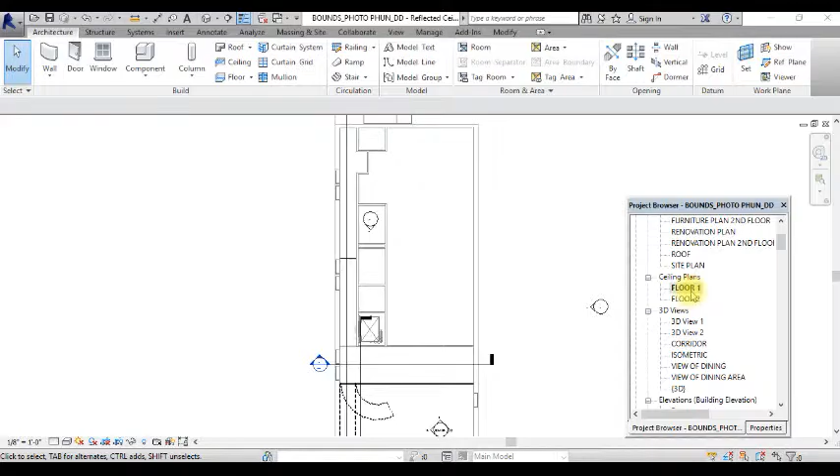Welcome. We're going to continue developing our corridor ceiling and our restaurant ceiling. What I'm doing right now is showing an underlay of what is on the first floor, and this is helpful when we're working on reflected ceiling plans to see what is on the first floor underneath, say some furniture.

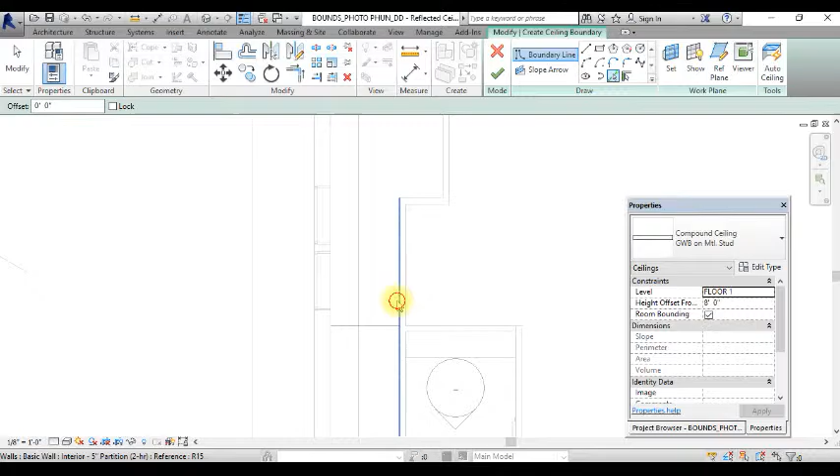Now in the corridor, I've set up another sketch ceiling, and I'm just putting them in at different levels. I can't get two different heights out of one ceiling, so I have to make it in different sections, and where the height changes, that's where I need a soffit.

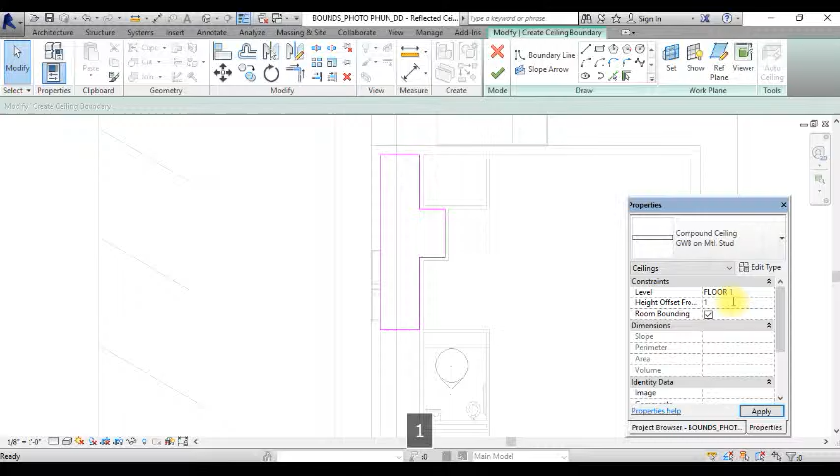So I'm just putting in the last little bit of ceiling. As I said before, you're going to need to put in a ceiling in every room, including the kitchen. And there's my last piece of ceiling, and we can see that it raises and lowers in the hallway going to the reflected ceiling plan.

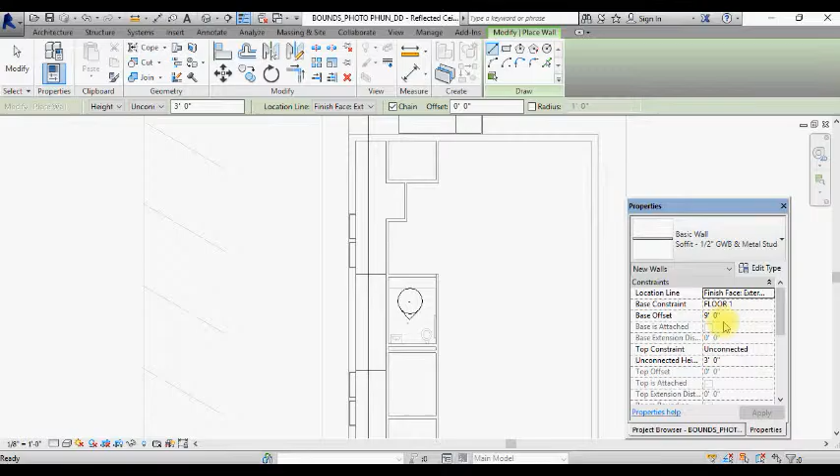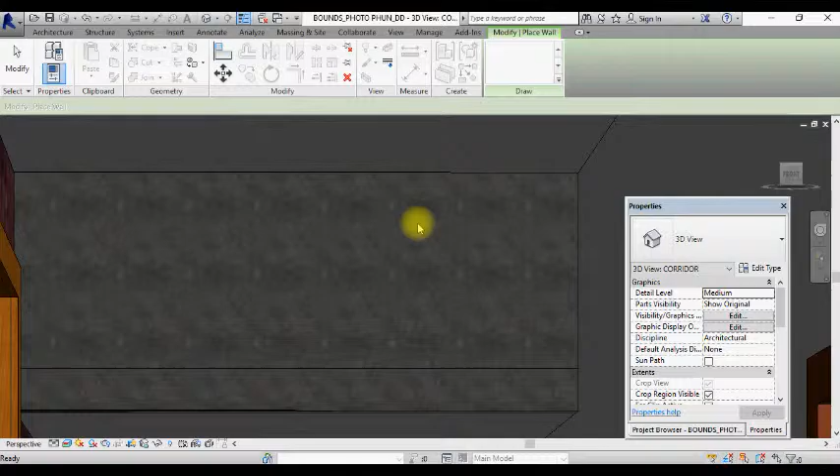And here's where I'm going to put in my soffit wall. Now, a note of caution: when we use a soffit wall, first of all, it's a very thin wall, literally 2 inches thick. Once we set it to be base offset of 8 feet or whatever we've used, we have to remember when we go and put in a different wall that it would also try to come in at 8 feet. So you have to be very mindful when you're using the soffit wall that you remember to reset it back to 0 if you need to do other wall work.

Now here I'm just painting my ceilings, my gypboard, making sure everything's that crisp white that I want to use on the project.

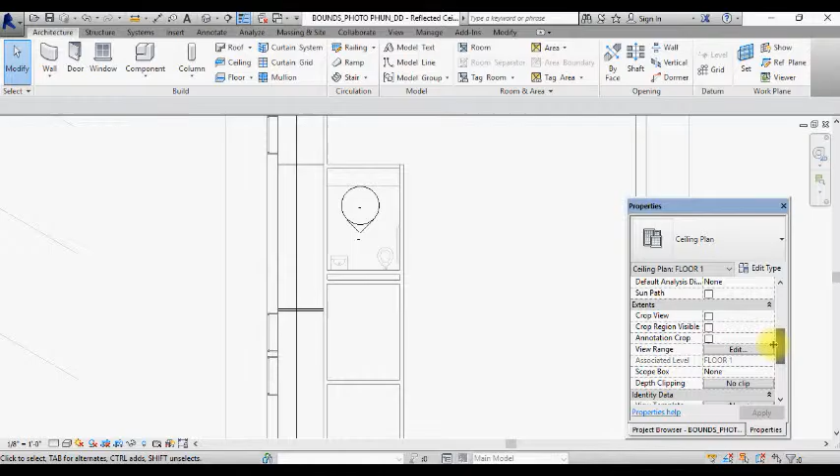Now, one of the things that happens with reflected ceiling plans is that we cannot see the ceiling or the floor. So there's a couple of different things. One is I'm going to lower the view cut line so that I can see where the doors are, because I wanted my ceiling to coordinate with my restroom door location, so I could put some signage there.

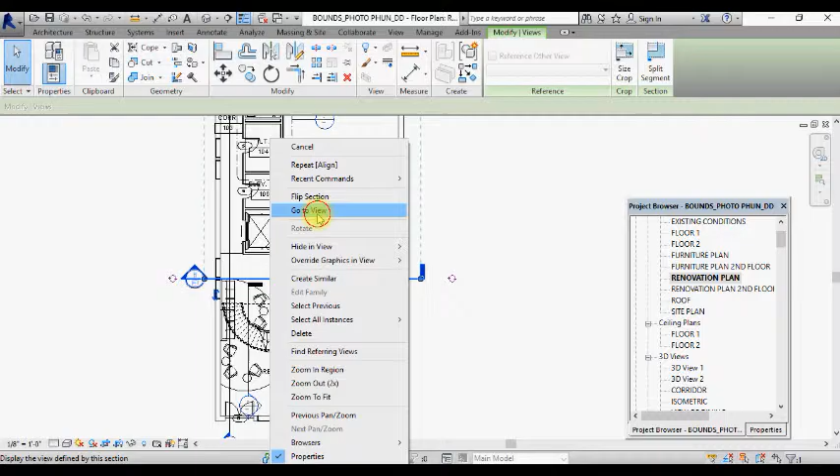I'm going to go back to my section, and I can see the first floor ceiling is in, and I have the second floor ceiling in as well. And that's what we want to see.

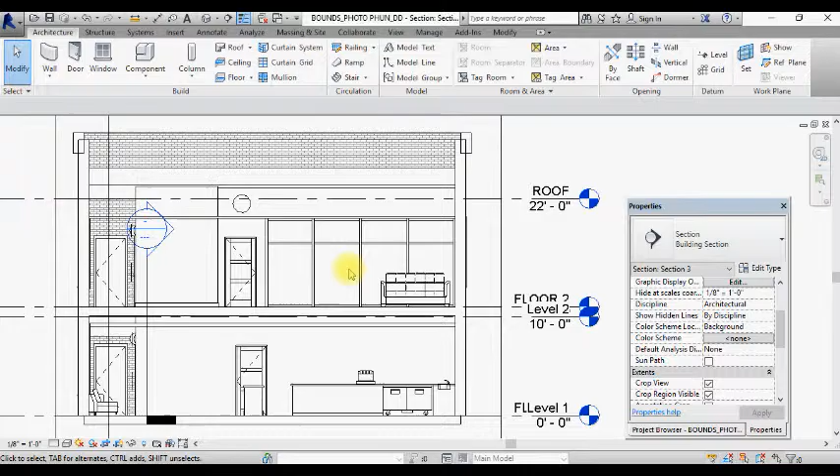I'm going to change out a door. I found those TruStile doors, loaded them in, unloaded the zip file. Here I'm simply changing the door, and there are other options for these panels on the doors, and I'm just working with them now.

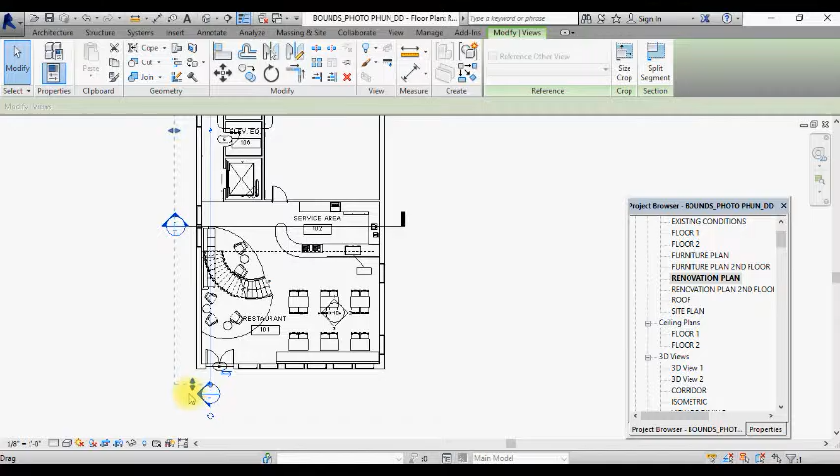Here we have a horizontal section through the space. This was the section maybe from the stairwell, but I'm going to actually flip this section that I used in the corridor around. Sometimes I'm making sections just to look at things. I'm going to hide that stairwell section because I had notes and things associated with it.

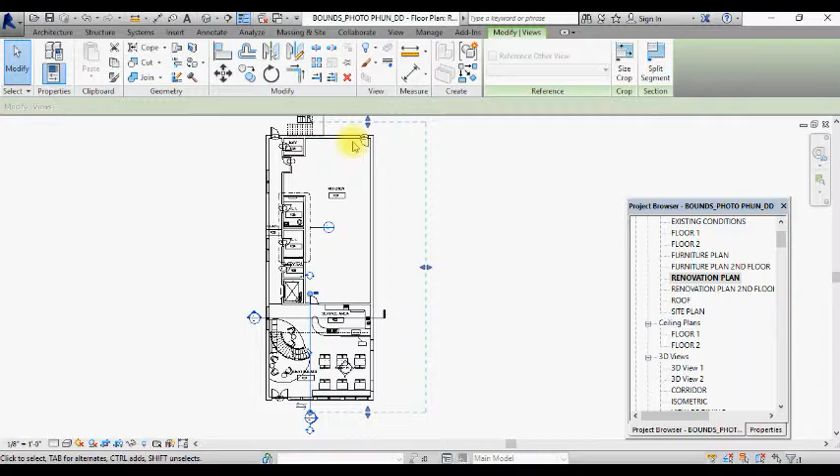So I'm turning the section around, and I'm taking the view so that it goes all the way through so that I can see the side wall. I could use the elevation for this as well, but these are just some working files that I can use to look at the design and change it.

So going over to the view, we're going to be able to look at putting in a special ceiling. We can do this just like we put in any other kind of component, but we have to first of all be clear about what surface we're working on, what are the materials, and that we put it in the correct category, which is the ceiling category.

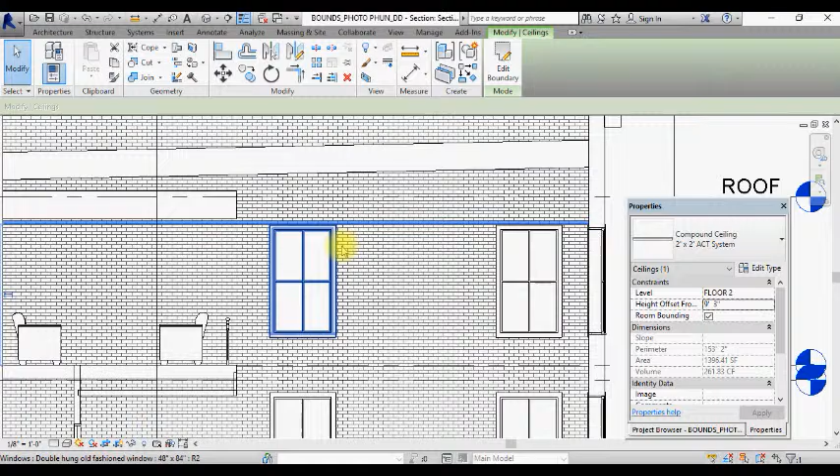So there's our ceiling, our acoustical tile ceiling. I'm raising it up to 9 foot 2 inches off the second floor so that it'll get out of the way of the window frames.

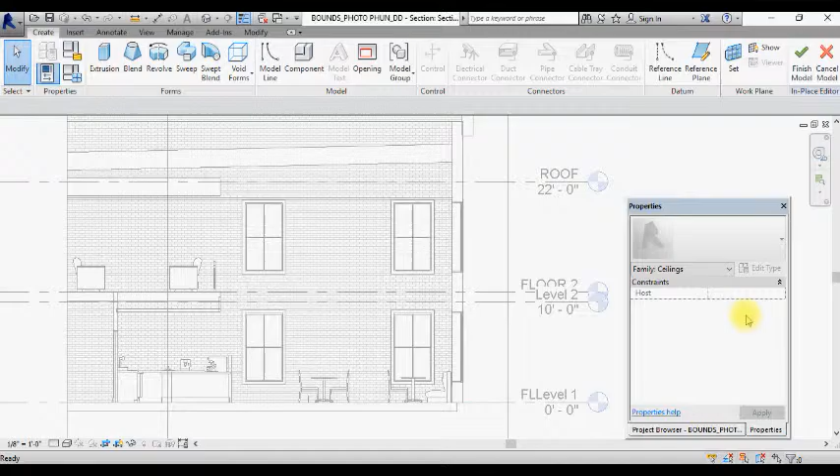Now I'm going to make this special ceiling, some kind of canopy. I'm going to name it Canopy, and I want you to do something similar in your design, whether it's vertical or horizontal, just something to hang down in the space that's going to help define the space.

It could be a rigid plane. I decided to make mine a little bit more drapey. I started out with a curve, and I looked at different angles, and I landed on this one, and I'm going to offset it 2 inches and copy it, and I'm going to make it out of a fabric.

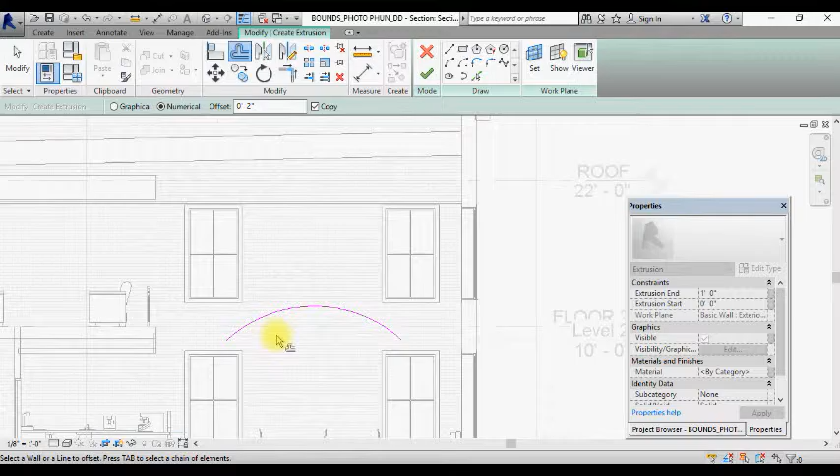So here I am offsetting it, then I've got to close the ends of that so I can make an extrusion. And it's going to make the extrusion based on the sidewall, which I can always move it out from there.

But that's where it's going to start. So I'm going to make this extrusion about 4 feet deep, because there are just some canopies hanging down the space.

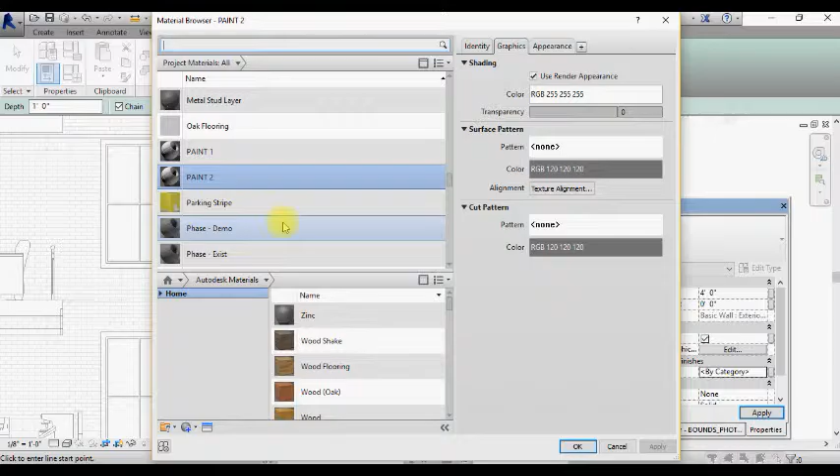And here's where I'm going to go find the fabrics. There are fabrics available, and you can load more fabrics and put that into my project and create that on this extrusion.

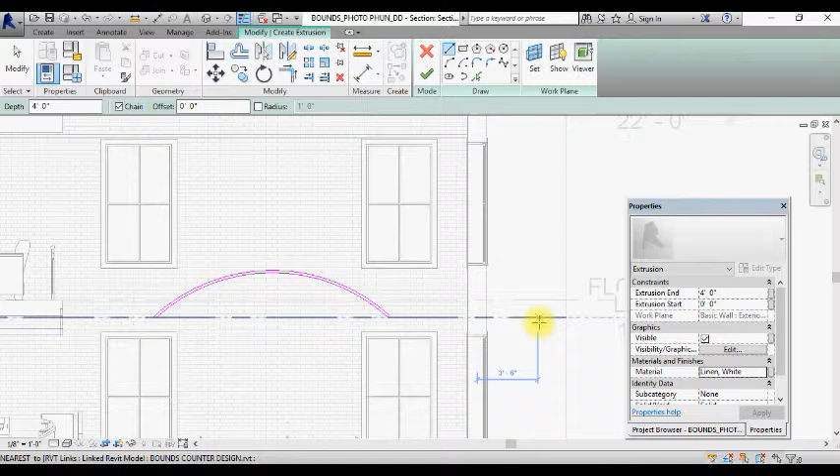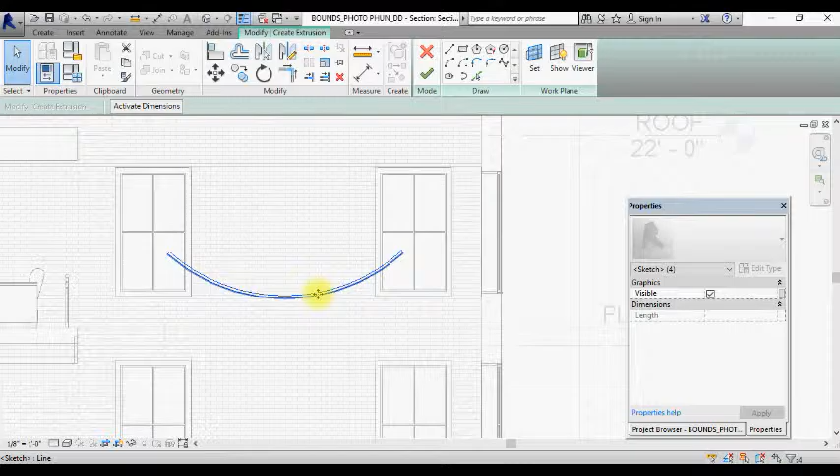I decided, since it was fabric, that gravity would have it draped down instead of up, so I'm going to rotate it 180 degrees. If you're ever having trouble getting it exactly with the mouse, you can always input the angle that you want or the measurement, and I'm going to sign off on that and finish that model.

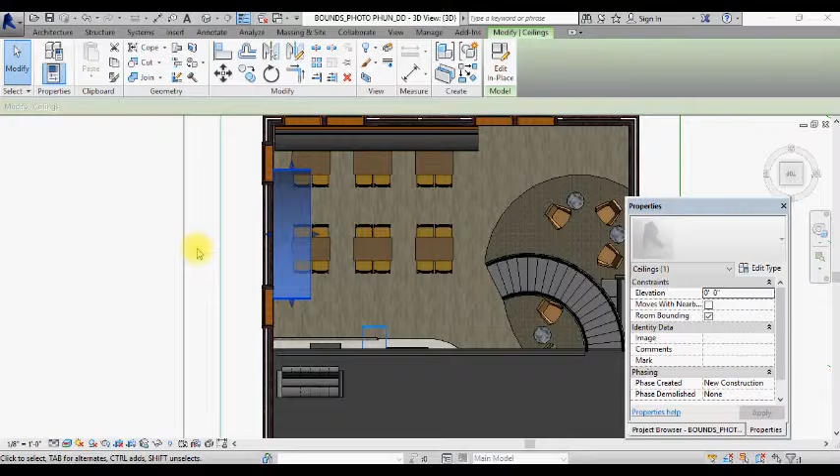And when I look at the 3D, I have to maneuver around because it was a little bit hard to see. Remember, in the 3D, I can move things in floor plan as well as three-dimensionally. Of course, it's safer to move it in the floor plan view or the straight-on view.

And with any kind of extrusion, it's usually connected into the side wall, so we have to actually move it away from the side wall.

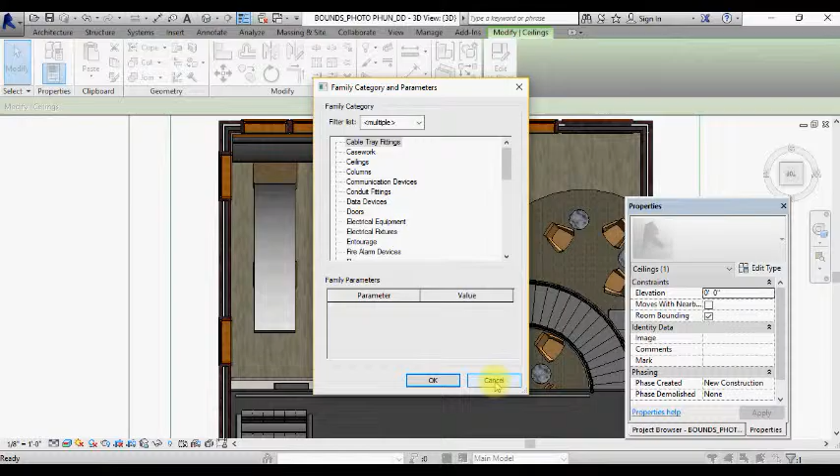And here I'm going to—you cannot use create similar on an extrusion. It's going to make you create it again, but you can use copy and put on multiple. I could have left it on constrain, especially if I wanted them all to be in a straight line. And here I'm going to copy all three of those to the side.

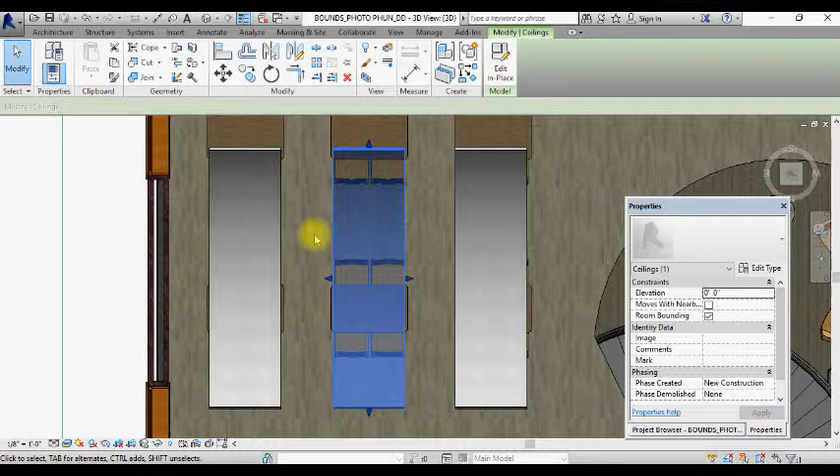So you need to get your design for your ceiling element in there, and it needs to make some sense with either your furniture arrangement or the use of the space.

You are invited to do different things at your soffits and your hallways. These are just some suggestions, and this is the 3D view that you should be turning in so that I can see all this wonderful progress that you're doing on your design. Thank you.